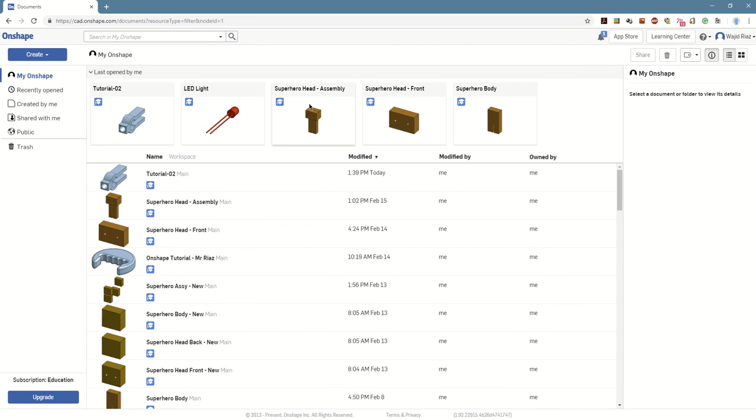So I'm going to focus on this rectangle first. I've got 36 and then 40 high, and I'm also going to make this through hole at the same time to save time and make our modeling much more efficient. So 36 by 40. Let's try that. Let's create a new document, tutorial 03. So while that's loading,

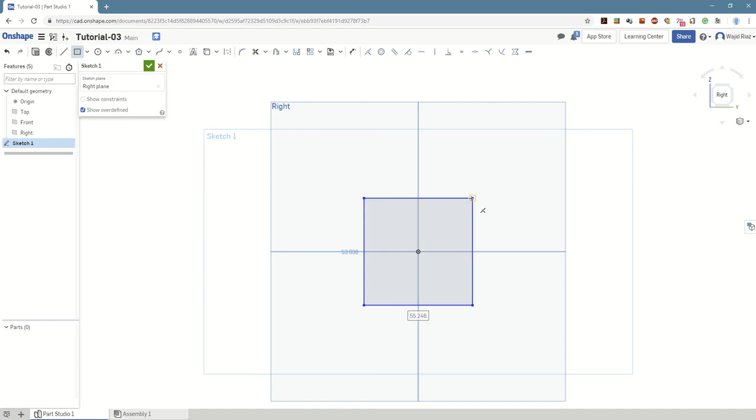I'm going to sketch on this right plane here. Click on that. I'm going to click our center point rectangle. We've got 36 and 40, so 36 on the bottom, 40 going high, and then before we extrude that all the way down, I'm going to make note we've got a 20 diameter circle. Because we've made our rectangle in the center, it's very easy to just click on the center point.

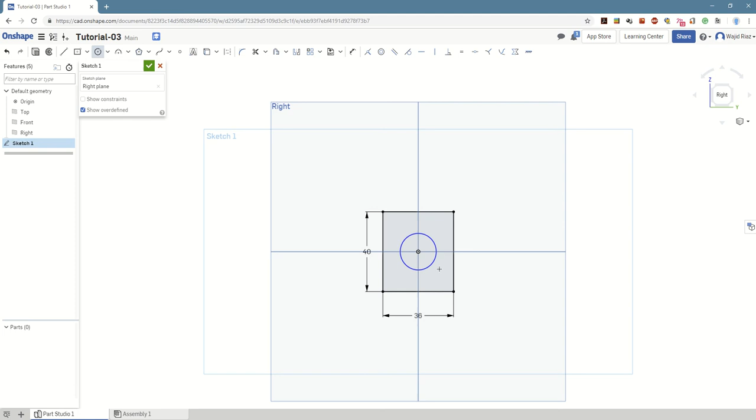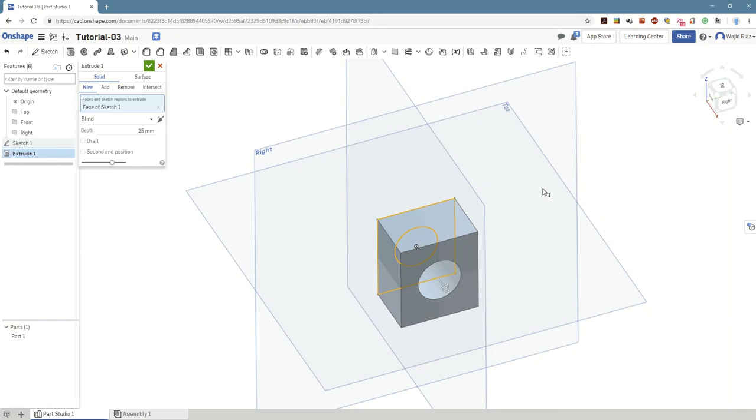It's 20mm diameter. We are now going to click on the green tick, and we're going to go to the extrude tool. It should just do the section without the inner circle. Now we can see that we've got a 76 length or depth to this rectangle. I don't just want to show you simply typing in 76 and having that extrude. I'd like to show you another feature. So from the drop down menu, I'm going to click symmetric.

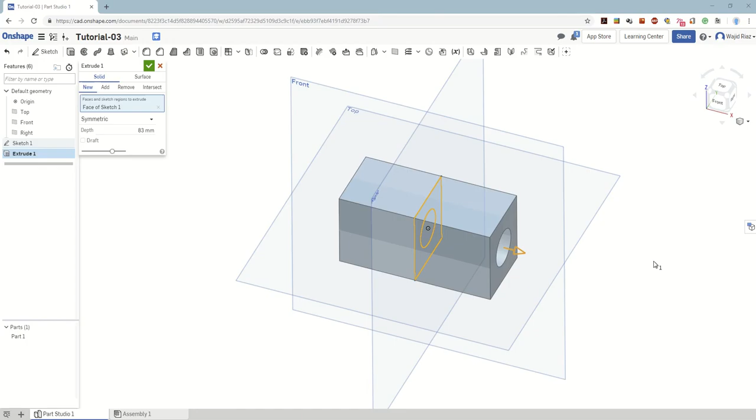What that does is it extrudes it from both ends, and if I use the arrow tool, as I pull that across, it extrudes it on both ends. Now you might be wondering, why is this useful for us? Because this part is highly symmetrical, we've got a line of symmetry here, and a line of symmetry there. I want to take advantage of the fact that we've got this plane that sits in the center and then another plane which sits in the center.

This is simply me trying to think a few steps ahead, and I'm hoping what you can take from this is the process of sitting down and planning out how you would model your part in your head before you attempt it. So we've got that central section here. I'm now going to start sketching on this face, and we need to make this slightly complex shape.

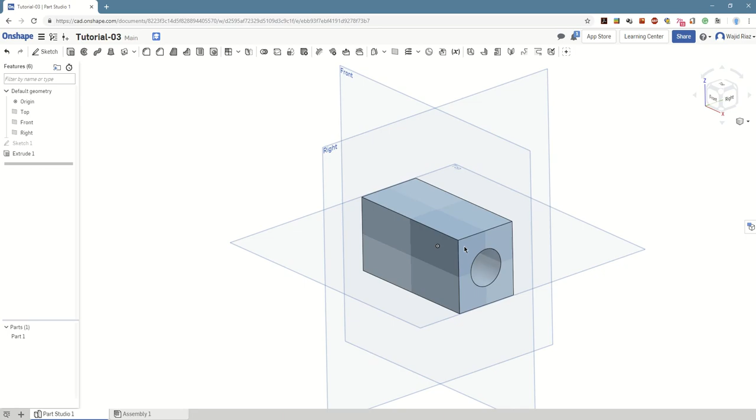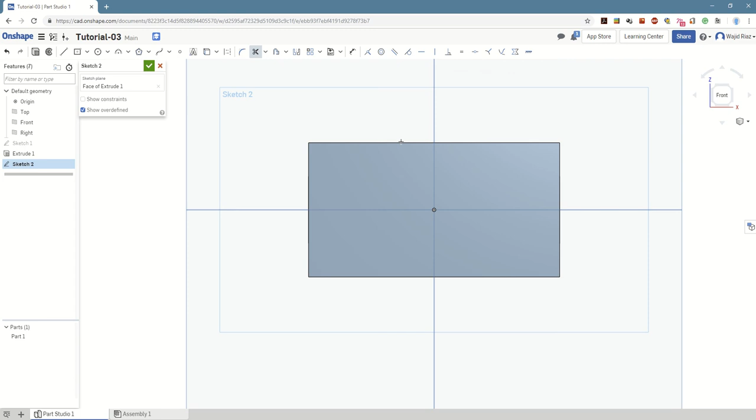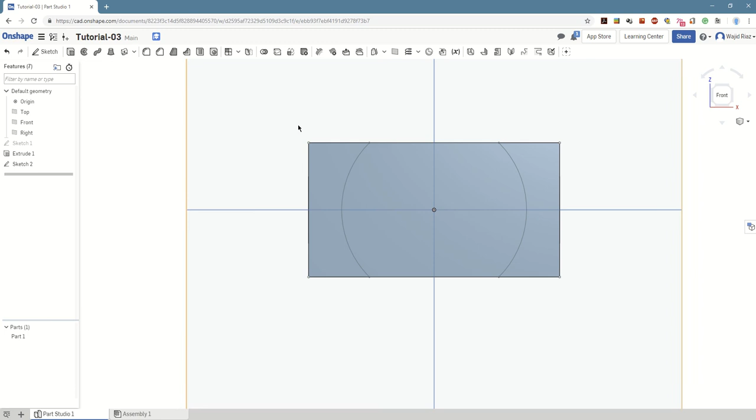Click on the green tick, we click on the extrude, we've now just got the section that we want. That needs to come out by 76. Now, sorry, the width here is 76. We now need to take away 36, which leaves us with 40, and then since that's from that end to the other, it's 40 divided by 2, so 20. So that's going to extrude out by 20 millimeters.

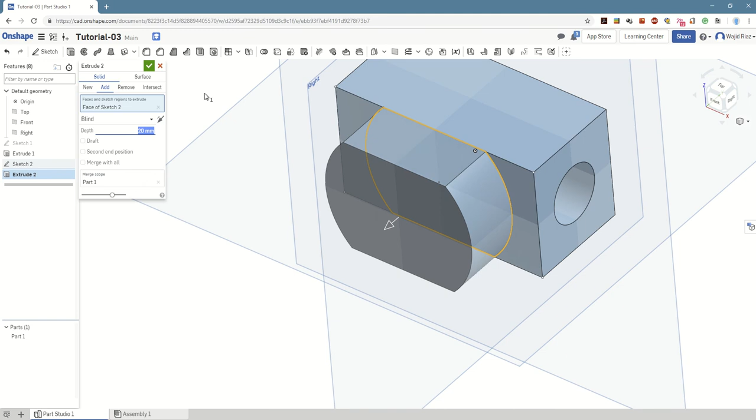Now, I know you might be thinking, well, hang on, it's not a very efficient way of modeling. We've still got some additional features to include. Yes, we do. We need to get rid of this section, and we also need to get rid of this hole. Okay? Now, there's nothing here which mentions that this is a through hole. We can't see where it ends. It's very difficult to gauge if it goes all the way through. I'm simply going to assume it goes all the way through, even though it doesn't state it's a through hole. It doesn't give us enough features in terms of where that ends.

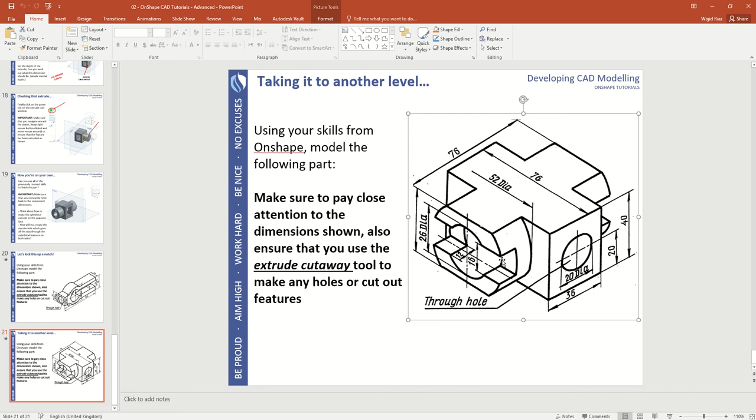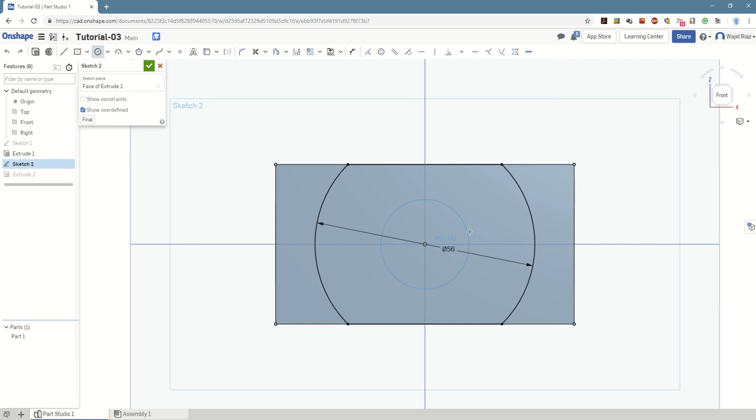So that is a circle of 26mm diameter. I want you to get into the habit of going in to your parts tree, going back, drawing some additional circles. No, wait, hang on. It doesn't state it's a through hole. So what I'm going to assume is it just goes and it reaches this face here. So that's why we can use this method, 26mm diameter. Click on tick. That's what we're looking for, okay?

Now we can go in and sketch on this plane and remove this rectangular cutout, which we know is 16mm high and goes in by 12mm. So a rectangular section. We're now going to click on a new sketch. We can't edit the existing sketch because this has a different depth. I'm going to click on front.

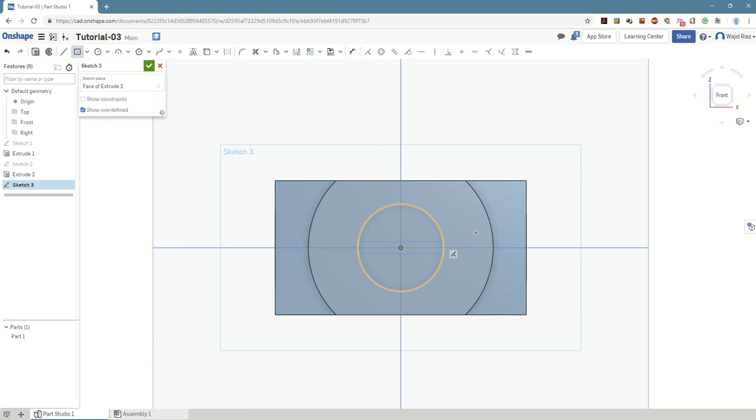We want a rectangle. We are not really too fussed with the width of it. We just want the height, which is 16. So the width could be anything. We'll leave it at 67, and the height is going to be 16, as you can see there. Now, we only need to make sure that the width is large enough that it extends past this circular feature here. That then allows us to start projecting some features, which allows us to then trim any geometry we simply do not want to remain.

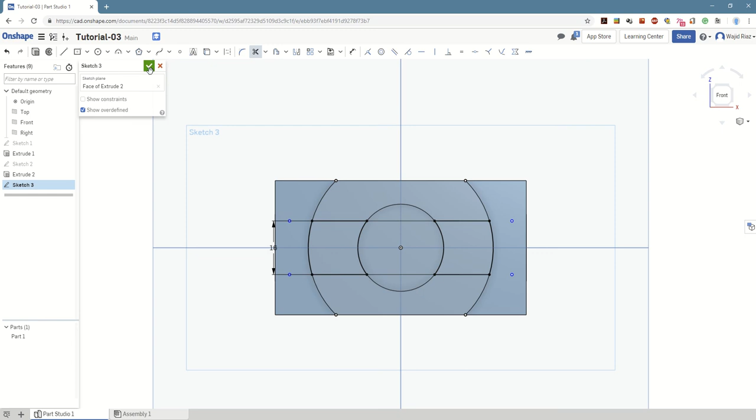So by doing this, all we've got left is this section here and this section here. Click on the green tick, click on the extrude tool, remove, click on this, and we know it needs to move in by 12mm. 12. And we're going to click on the green tick. Now that's great. As you can see, we've got half of it.

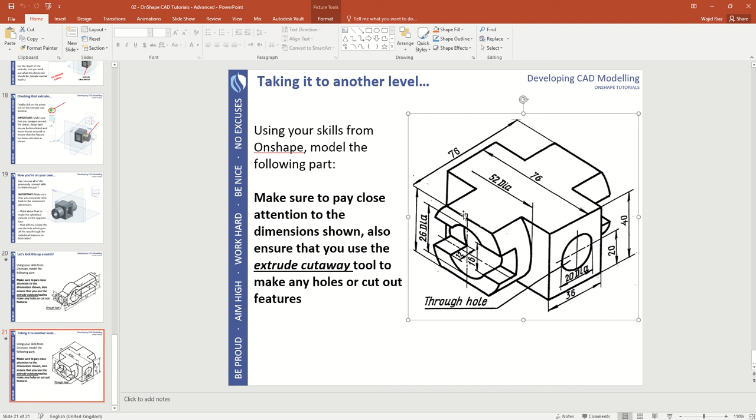But what I tend to do is I get one side right, knowing that I've modelled it with a line of symmetry. I now need to take advantage of the fact that I've modelled it in a particular way. I'm now going to mirror this feature along that plane of symmetry. Remember from the previous tutorial, I select my mirror tool, select a feature. I need to select quite a few features, and what I can do is in my parts tree I can select my extrude 2 and extrude 3.

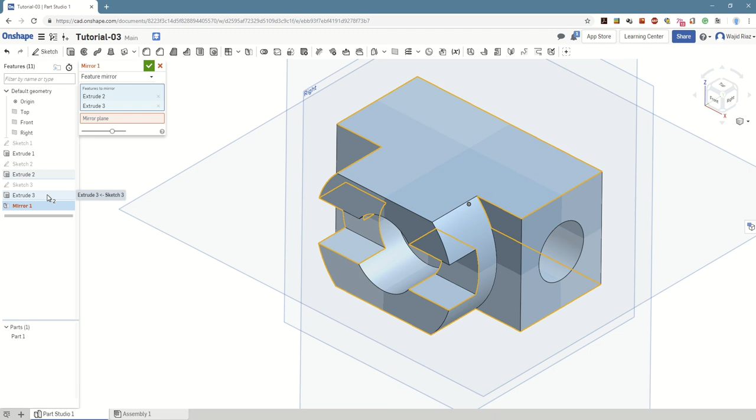Now I click on my mirror plane, I select my front plane, which acts as a line of symmetry, and it always gives us a preview so you can have a look at that. I'm happy with that. Click on the green tick. We've now got our part made. So well done. You've now successfully modelled a fairly complex shape.